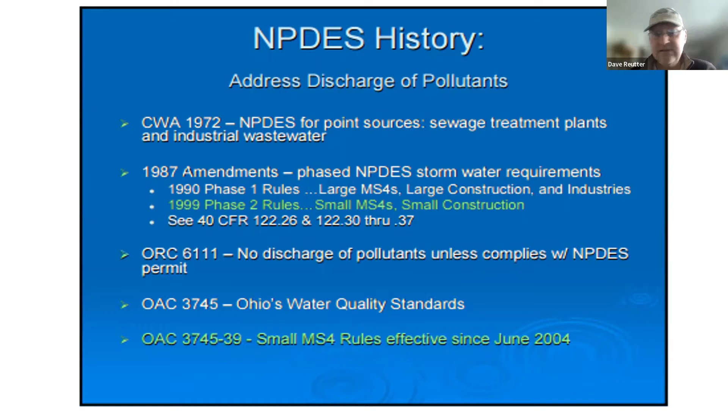Now, when we're talking about public participation and outreach, we might be talking more about your municipal boundary. So there is a bit of difference between the MCMs, the minimum control measures, what we're talking about with MS4s. So when it's public participation and outreach, that outreach has to reach half of your population, so then we're maybe talking the entire municipal boundary. But when we're talking in an IDDE, and we have discharge that goes to your system that is maintained by you, that's where those requirements kick in that you may have to be compliant with. So something to consider as we go through and talk about some of these items.

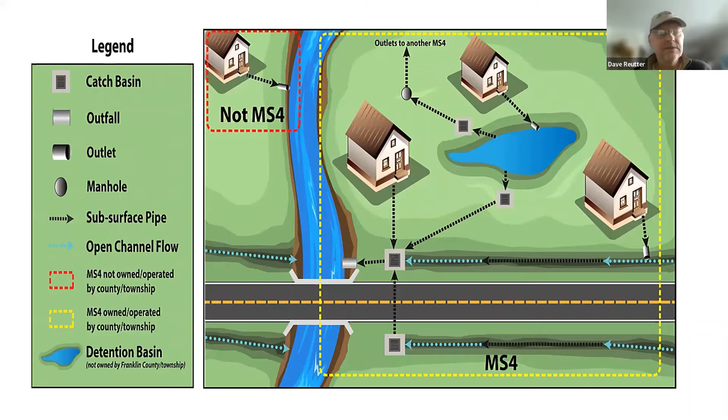I think that's all I've got here. I want to do, let's see, what do I need to do here? There we go. Hopefully we're getting a share screen.

That is not screen sharing, is it? No, you're good, I am seeing the permit. Oh, are you? Come on, I'm not. That's a good question, I've lost that screen now. Where am I at here? Bear with me, I'm sorry. No worries.

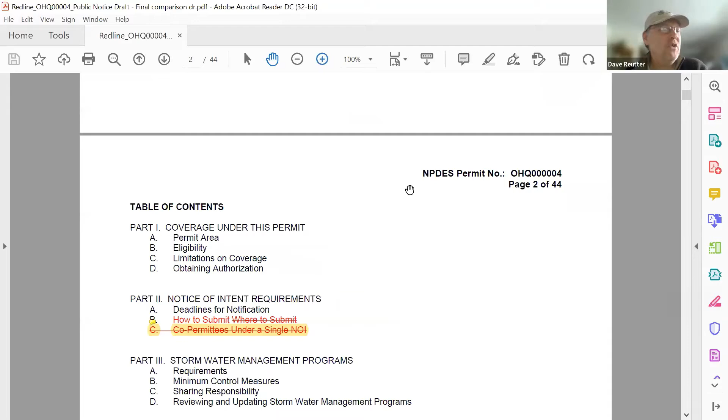Are you seeing it now? Yes, okay. Are you seeing? Okay, do you need me to keep? Okay, I'll let you go back. Go ahead, if you had something to say, I was fumbling there.

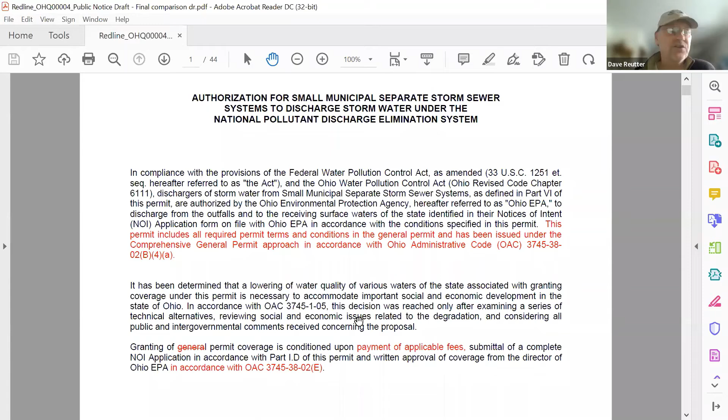It's hard for me, I'm a visual person. I can't look at the black and white copy of the permit and tell what's changed or what was omitted. So I've gone through this as fine a tooth comb as I can and updated this. I'll give you an example here. Highlighted in this is this C that they've struck out, and that's been deleted there. I've made that yellow so that I know that's something that's not in the final permit now.

We can make this available to you as well. I plan to go through this and look at the various things. This is the complete permit.

Here's Appendix A, small MS4s and US EPA approved TMDLs. This is really what made the permit go from maybe 28 pages to 44 pages. So there's a lot of changes overall because they did some updating of language, made some small edits, but also added significant text in some areas, and made edits to the final version that don't show up in this draft version.

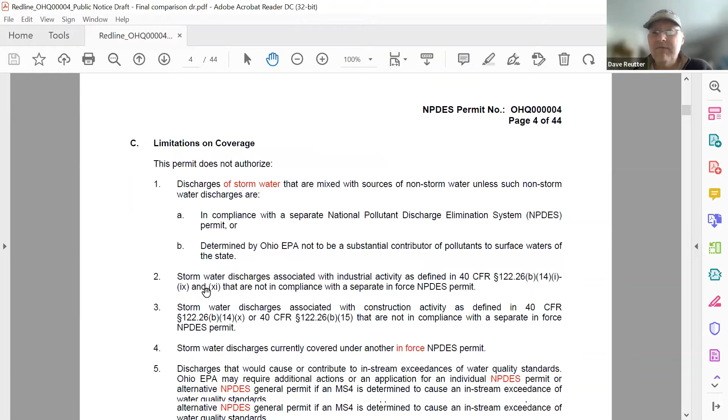So I've tried to note all those with comments in there. You're free to take a look at that. We'll have that posted up after this for your use as well.

I'm going to focus on MCM 3. You can see all the red markings in this, a lot of changes going on, a lot of things to look at and see what the comments are as far as the changes go. Here's a whole new section. This comes about because of the TMDL requirements now in there.

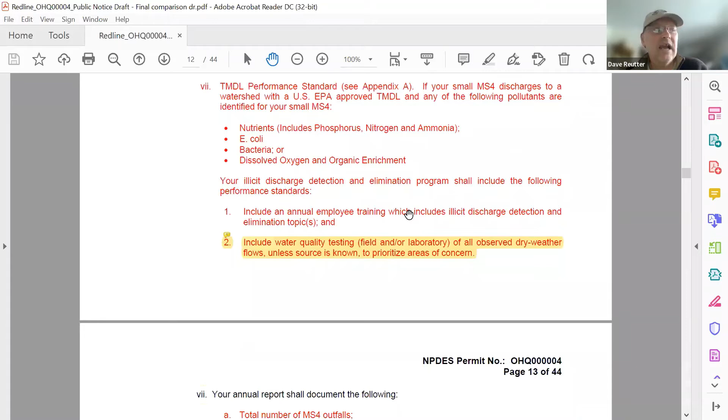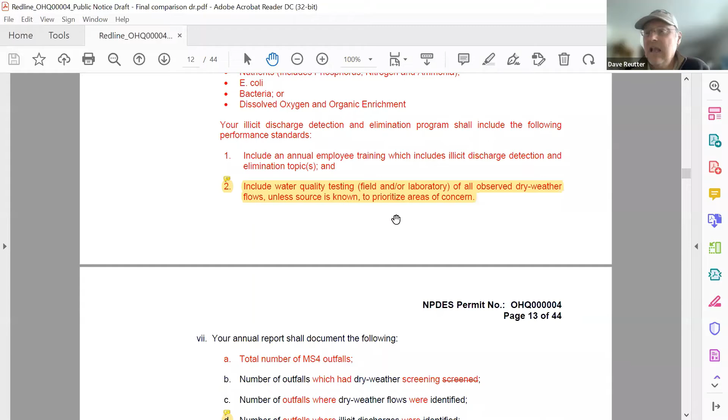So there are a couple of large sections that were in the draft that stayed in there, as well as some things that were taken out because they were found either too costly for communities to implement, or communities didn't have the legal authority to really get those done. So there are those edits.

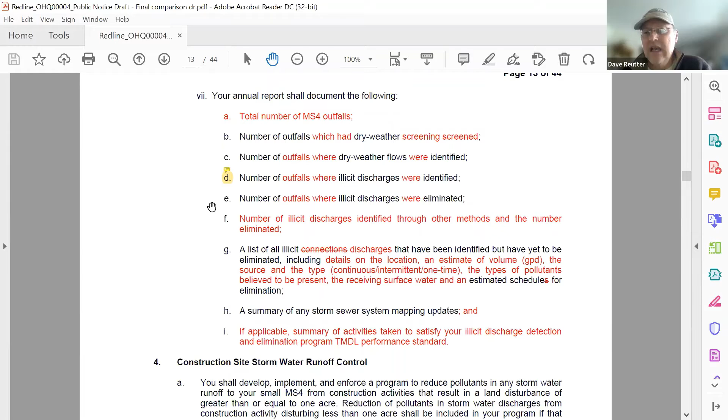Again, you can see these small yellow highlighted areas that are changes from the final permit to the draft permit as well. Let me get the MCM 6 here.

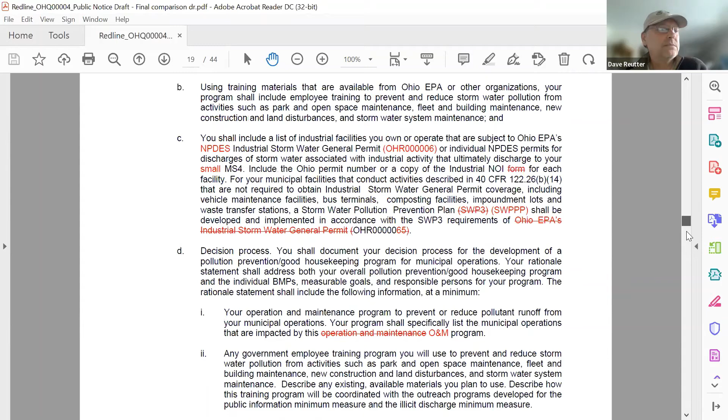As I scroll down... I went too far, hold on a second. Nope, no, I haven't gone far enough. I still haven't found a good way to do this.

But we have a long list of Franklin County that these TMDLs apply to. So as we go through some of these requirements, keep in mind that the TMDL performance standard is related to this Appendix A. So if you're listed in there, if you're a community in the Olentangy or the Big Darby or Big Walnut, you may have these TMDL requirements to meet.

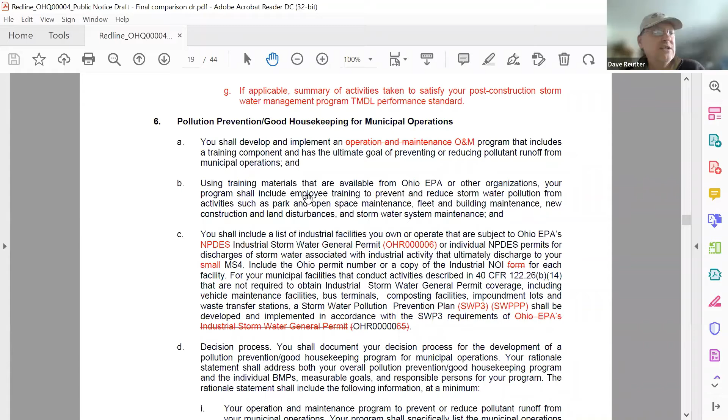We'll talk specifically again on MCM 6 and what some of those changes are. You can see here's a couple of things in red - these are just little updates and clarifications. I have no comments on the changes here.

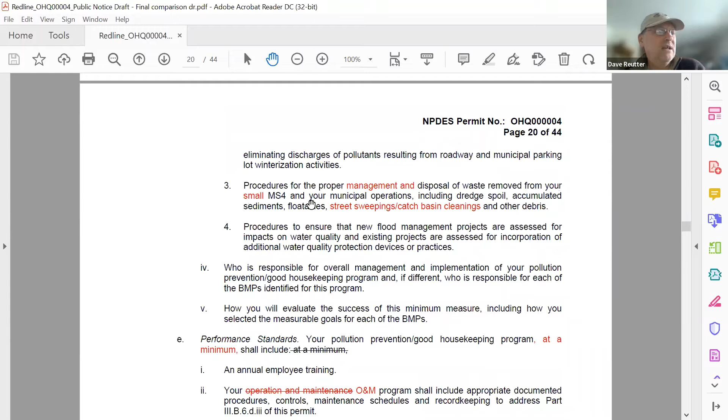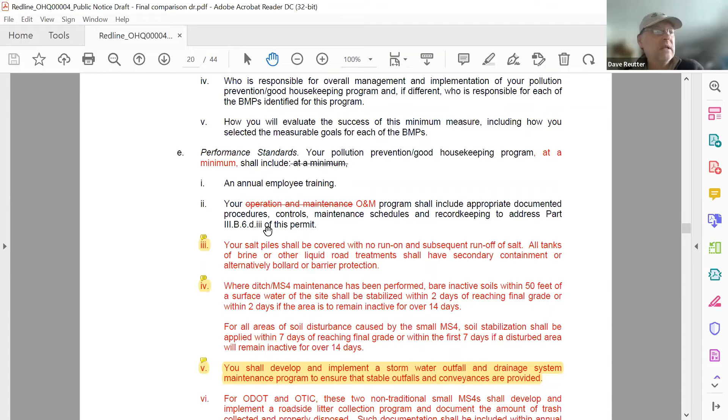So here again, performance standard: your pollution prevention good housekeeping program at a minimum shall include annual employee training. Contact us if you need it - we've got plenty of options for you. We can help you take care of that.

So here's something: your salt piles shall be covered with no run-on and subsequent runoff of salt. All tanks, brine, and other liquid road treatments shall have secondary containment, or alternatively, bollard or barrier protections.

So the difference between what was proposed in the draft and the new permit is they added - you've got 2 years to complete that with the re-up of your permit time. Everybody who has a permit probably got notice of that. If you've got salt piles that need covering, you've got 2 years from now to get that taken care of, or secondary containment or some kind of protection for your salt piles.

Ditch maintenance - this was another thing that changed significantly from the draft. Let me get my draft comment coming up there.

So something they did was change this - they reworded it to reflect the construction general permit stabilization table, which shows that if you're within 50 feet of a waterway, you should be stabilizing within 2 days. This might affect operations in a lot of communities regarding ditch maintenance, but as you go about your work, if you're close to a stream, you need to think about that 50 foot buffer and how you're going to stabilize it.

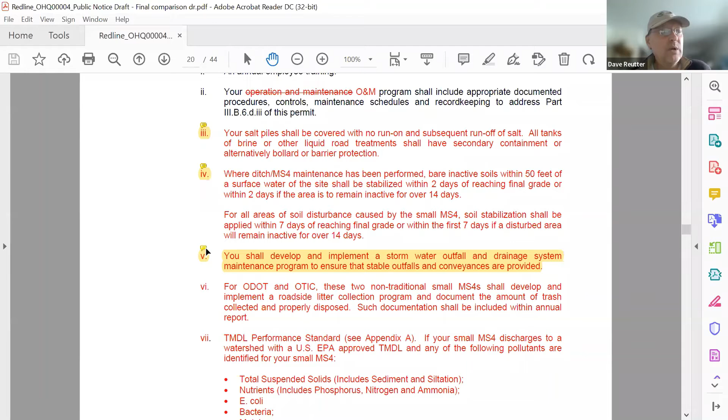This was deemed fairly expensive for a lot of communities that don't have the resources to do this kind of thing, so that was one instance where they've actually deleted something out of that draft.

So number 7 here is the TMDL performance standard in Appendix A. You can see that if you have any of these - that's something to keep in mind - a lot of these performance standards are based on that Appendix A inclusion. So be aware of that.

Take a look at your community - is it on the list? Is it not on the list? Are you in those watersheds? Really take a look at what is required of you to meet those TMDL performance standards. There is some difference there.

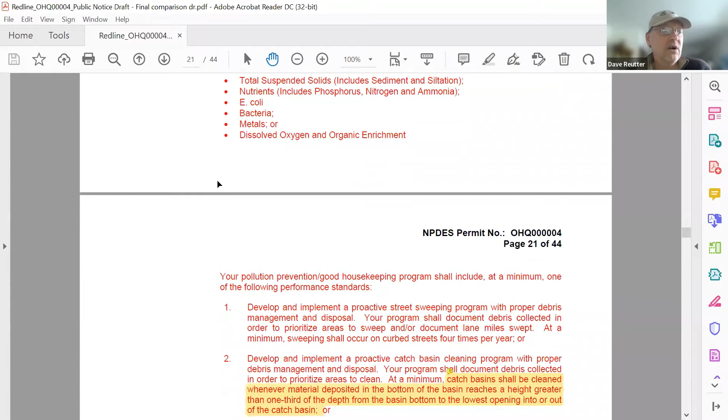Again, I will just look at the comment areas, but everything you're seeing in red that is not highlighted is basically something that will come up as a performance standard in your community if you are in that Appendix A.

This is develop and implement a proactive catch basin cleaning program. What was in the draft was that catch basins shall be cleaned whenever materials reach a certain level - it was kind of prescriptive about when you were supposed to be cleaning catch basins. That's been changed to: catch basins shall be scheduled to be cleaned once every permit term, basically once every 5 years. So they've changed that prescriptive language to a more generalized approach - you need to look at your system during the permit term and make sure it's working. It's a matter of keeping your BMPs functioning, that's really what they're looking at.

Your pollution prevention good housekeeping program shall include at a minimum one of the following performance standards, so you need to be doing one of these if you're in that TMDL appendix. You can either do leaf collections - I know a lot of communities do that - a lot of communities clean their basins, or proactive street sweeping. I think this is pretty low hanging fruit for most communities; they're doing maybe all 3 of these, not that big a concern for most people.

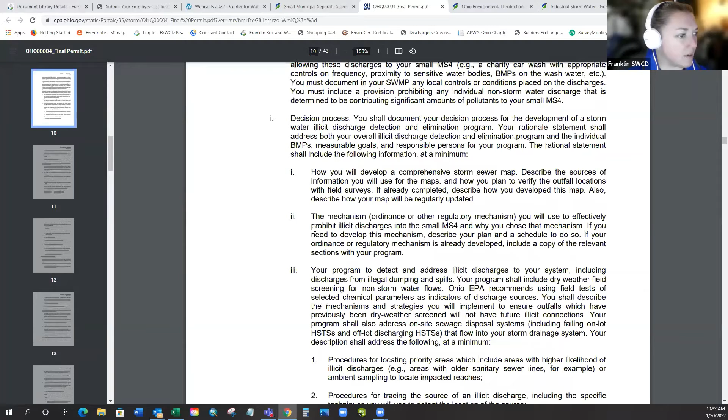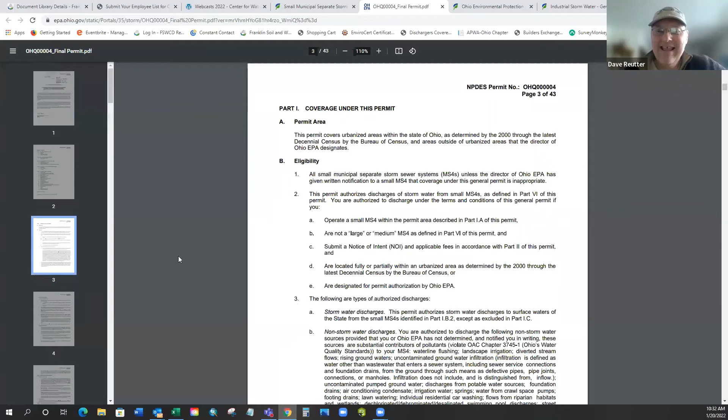I still think, based on the language, let me go back up to the initial part where it talks about your facilities, because that's where they kept the language essentially the same, I believe. Discharge going, let me see, find myself where I'm at. Sorry guys, I did the same thing, curious. Let's see. It's that black and white permit language, tough to look at sometimes.

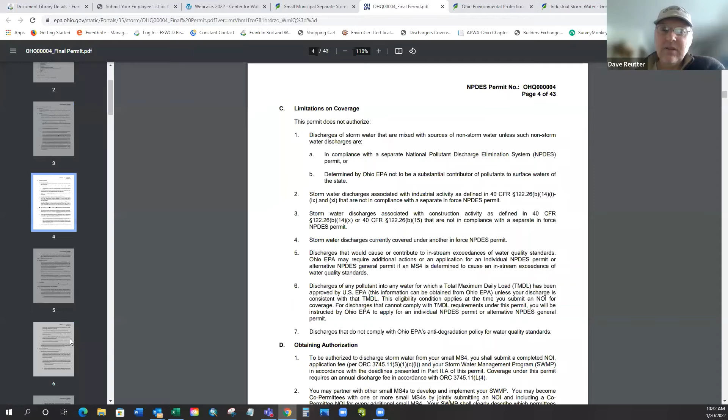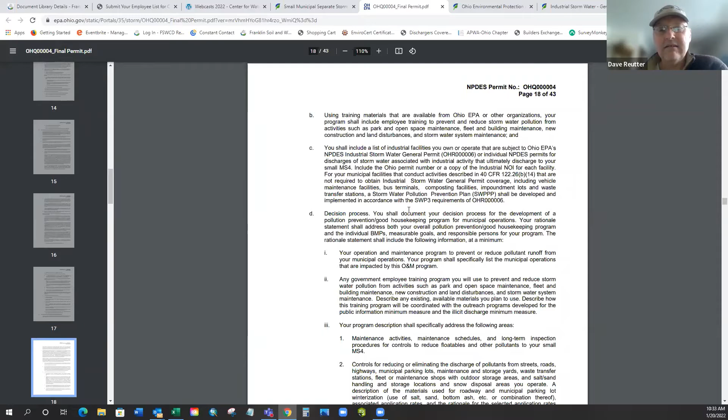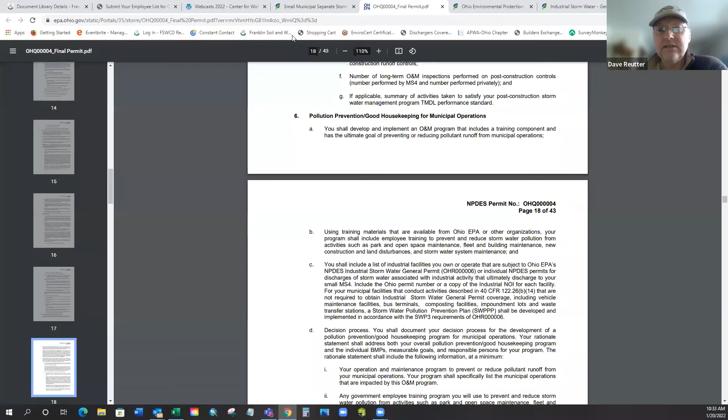But yeah, I think the inspection aspect, something we're going forward with and recommending, is those quarterly inspections. During one of those, during a wet weather event, while you're out there anyway, take a visual sample, take a jar, gather some of that runoff and look at it to see if there's oil and grease, foam, cloudiness, and just record that. It's just as easy as doing that and having at least one of those sampling episodes for your site.

Right, exactly. And EPA did have, I was having a little trouble, it looked like they changed their web link for their MS4 site and I'm having trouble accessing it right now, but they had a couple example videos on there from other states on how to collect samples, whether from an actual outfall or maybe you don't have outfalls and everything sheet flows through a parking lot or a swale. So just how to collect a representative sample. You don't need to have it sampled or sent anywhere for testing.

You're just looking for a visual look to see if there's any sediments, oil sheens, any trash or things like that, just so it alerts you to maybe some things that you could be doing a little differently on your site to prevent those types of things from getting off site. Everything when it's dry, you don't have much going on, but the wet weather inspections are real important, I think, to just have a better understanding of that.

So again, it was in the same section, I just scrolled too far down. The initial language is just talking about any facilities, vehicle maintenance, bus terminals, composting, impound lots, waste transfer stations, anything where you've got fueling stations, salt, brine, vehicular maintenance going on, you should really have a SWPPP. It's really about anything you're looking at, things that are exposed to stormwater during those inspections. So thinking about what you've got outside, that could be either drainage, rainfall falling on it, or maybe gutter discharge washing across and interacting with things. So making sure things are up off the ground, tarped, and covered appropriately.

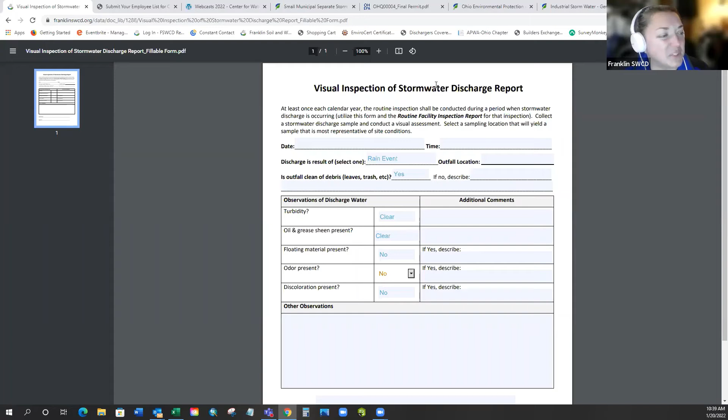Yeah, and the other thing that came up too, not just about inspections and what frequencies people should be doing, was the shared use of facilities. We have some communities that have a couple different sites they use for maintenance, different kinds of activities, and some actually lease or share space with other entities. So there were questions about, do I really need to develop a SWPPP for that? Are we responsible for that?

And the answer is yes. Essentially, if you are leasing building space from another entity for maintenance activities, then the MS4 needs to develop a SWPPP for the space in which those activities are occurring. It'd be a good idea to know too—whoever you're leasing space with may be doing operations as well—so make sure you understand each other on what's happening, and share training and information.

The thing I would stress is if you're only doing a little bit of activity in a situation like that, maybe look at moving that activity to a site you fully own, and don't spread out with all these little areas—like having a fueling area at one site. Try to find a way to put them all in one site so you're not putting yourself in a gray zone of, well, it's this entity's responsibility. You need to be aware anywhere you're doing those kinds of activities—you should have a plan in place and people should understand what they need to be looking at.

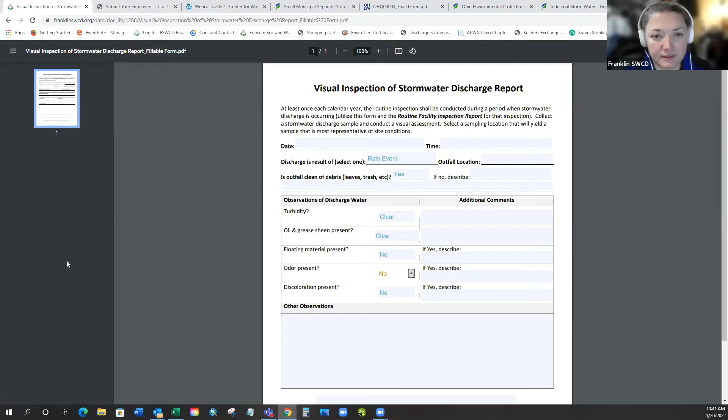That's a good point about covered salt piles, and not only that, but there's new language about run-on and subsequent runoff of salt. So it's not just a matter of covering your pile—it's if there's a discharge that's actually making it to a catch basin. I've seen several facilities with problems from brine created by run-on coming underneath the pile and through the pile and out the other side. That's the kind of thing they're really looking at abating—that addition of salt.

So be cognizant of your salt piles, especially if we have a bad winter where you have to store it outside or something like that. Make sure you're doing it on an impervious surface, it's covered, you're cleaning up, and you don't have run-on and run-off problems. Just be aware of that if you have salt.

Yeah, and that's just something in general—anything outdoors—think about if you have gutters that discharge to pavement. Is there something downstream from where that water is going to interact with something and make it easily washed away? Even if it's got a tarp on top, is it still in contact with the pavement? Think about ways you can redirect that discharge—can you take it inside or undercover somewhere else to limit that interaction altogether?

Let's see here. If you're not familiar, EPA has been updating their website links and pages, so we might—I'm still finding they've recently updated it, haven't they? It's changed a bit, and the bookmark I had for the stormwater page is no longer working, so they must be updating that at the moment. So there's something there still apparently going on.

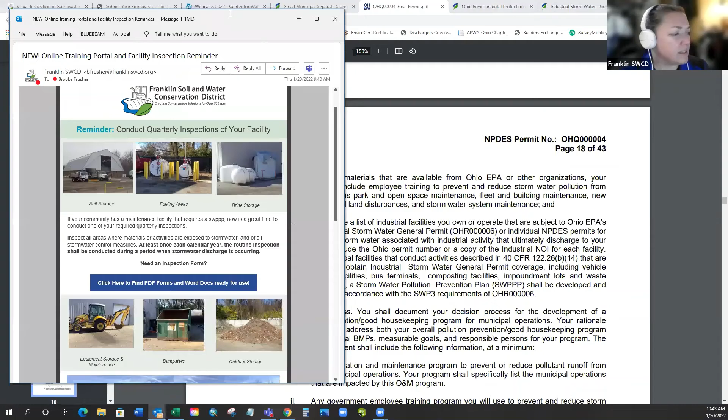I'll throw this out there. We did this a little bit a year ago, trying to remind people of good times to conduct inspections. I'm going to try to work with putting together a quarterly reminder email out to most of our local partners. If you're interested in being on that list, let me know, so it doesn't go out to people it's not applicable to. You'll have easy access to those two generic documents should you need them.

I'll also push this online portal training we've got to help with that annual training requirement. Due to COVID, we had to get away from in-person training, so we went virtual with an online portal with Excal Visual, a company we've used in the past for training courses and DVDs. We've had quite a few people take advantage of it this year, and it's still a free option.

If you're local, within Franklin County, a municipality, township, or county interested in providing good generic information on stormwater pollution prevention to your employees, whether new, seasonal, or just refresher training, these are online courses they can take at their discretion when convenient. We track it all, so we know who's completed what. They take roughly 15 to 30 minutes depending on the topic, and we can assign different ones. There's quite a few different courses we have.

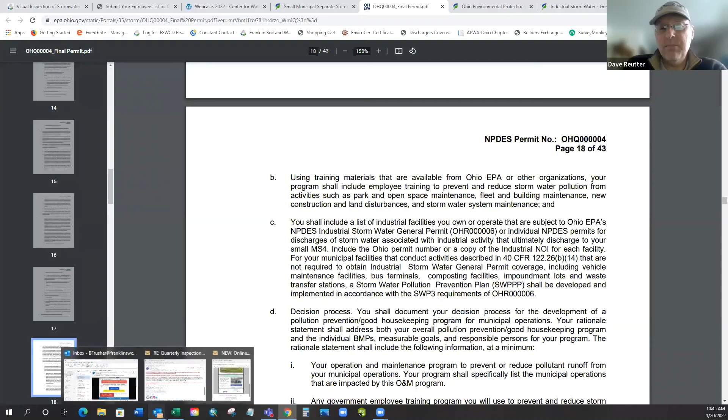We can certainly help if you have questions or need help with facility site inspections, let us know. We've been talking a little more about that, and you definitely want somebody from your facility doing those walkthroughs. So if you're thinking about having someone else take over some of that responsibility, just make sure you still have at least one of the people at that facility tagging along through that inspection - that's a permit requirement as well.

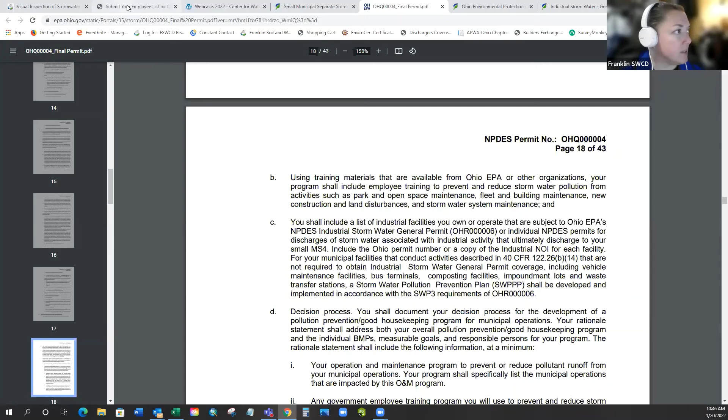I think it's the webcast - I think that's all I have. I'll stop sharing for a moment and turn it back over to you, Dave. If there's any questions. I'm now going to reshare my document.

The rest of the red line was pretty much changes made to reflect the annual reporting, and I did want to touch on that a little bit. We're getting to that time of annual reporting, so there's numbers that need to happen, especially with MCM 6 and the new draft of the new permit - it lists what was in the annual reporting as far as gallons of pesticide used, your road salt usage, pounds of fertilizer, all that kind of thing.

Again, that time of year is coming up. We do a lot of that reporting for communities, and we're pushing to get that information in so we can get it entered by the April 1st deadline for the annual report. With that is updates to your stormwater management plan for this new permit. They want you to submit one during this round, but it doesn't really apply until next reporting. I think there's even language about having 2 years to update from the permit renewal, so I need to double check on that, but yeah, we're currently updating a lot of stormwater management plans to reflect the new permit conditions.